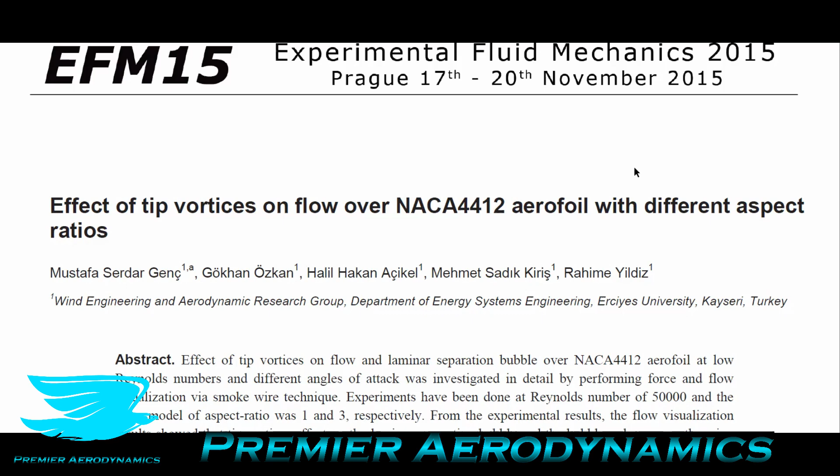So let's talk about the effects of these wingtip vortices with different aspect ratios. This is quite interesting because it affects all the flow physics.

One of the studies that looked at the effects of the aspect ratio on the aerodynamic characteristics of wings was presented by Mizoguchi and Itoh, and they first concluded that the influences of the aspect ratio were not as important as they first thought when the aspect ratio is above 3 or more. That means the span of the wing is 3 times the chord or more, so it's quite wide. But different aspect ratio wings below 3 were significantly affected, and the tip vortices have significant effects on the aerodynamic characteristics of these airfoils.

The effects of the tip vortices increased when the aspect ratios of these wings decreased. The maximum lift coefficient and the stall angles considerably increased as the aspect ratio was equal to or less than 1. In other words, as you reduce the aspect ratio, the maximum lift that you see in these wings and the stall angle dramatically increase, and we'll talk about why that is in a second.

A couple other researchers looked at low Reynolds number flows over different aspect ratio wings for Reynolds numbers of 10,000. This is important because at 10,000, the flow is most likely going to be laminar. That's not always the case if you have a very turbulent, very high turbulence intensity flow ahead, but typically speaking this is going to be laminar. Once you get to about 200,000, then that's when we generally get transition to turbulent.

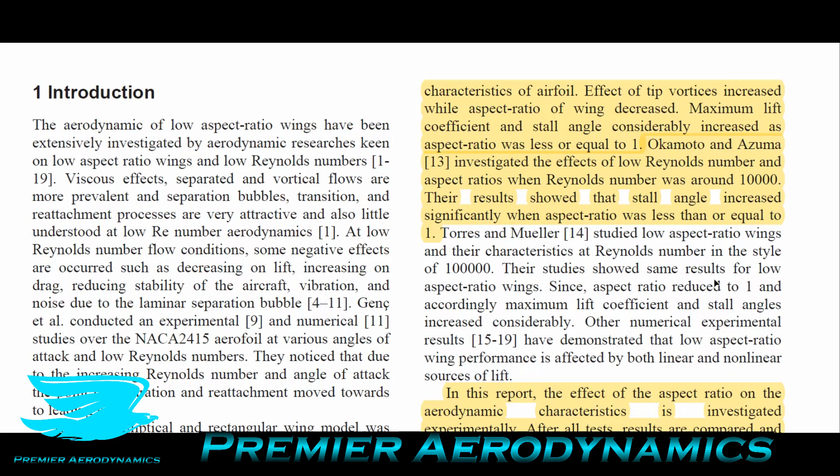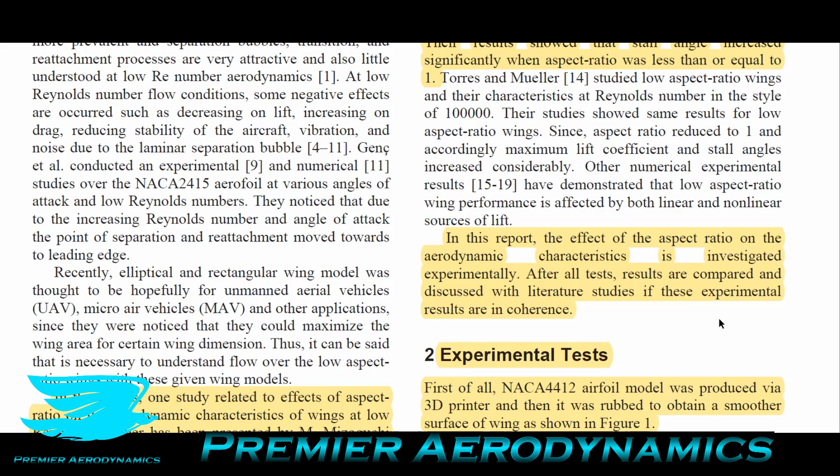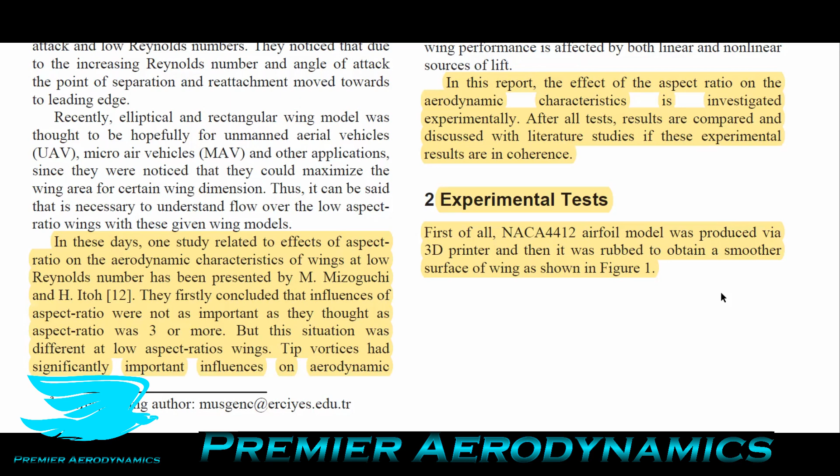In this study, the effects of the aspect ratio on aerodynamic performance is investigated experimentally. After all these tests, the results are compared and discussed with the literature to see if these experimental results are in agreement. The experimental tests involved printing NACA 4412 airfoils with different aspect ratios using a 3D printer, then rubbing them to obtain a smoother surface of the wing. This is important because even good prosumer and industry grade 3D printers have roughnesses to their surfaces, and this significantly changes the performance of the wing.

One major reason is that these roughnesses, depending on how you print the airfoil, can be longitudinal or lateral, and they will turbulate the flow and trigger turbulence at a lower Reynolds number. A rougher surface results in a more turbulent flow, and a more turbulent flow typically results in a higher stall angle because the flow has more energy.

As the flow goes along the surface of the wing, it can withstand what's called an adverse pressure gradient - this pressure pushing back against the oncoming flow, which decelerates it to the point where it separates. If you inject more energy, like higher momentum flow near the boundary layer close to the wall, this can overcome the pressure gradient even longer, to higher angles of attack, giving you higher stall angles. So surface roughness is a big deal, and that's why they sanded these down.

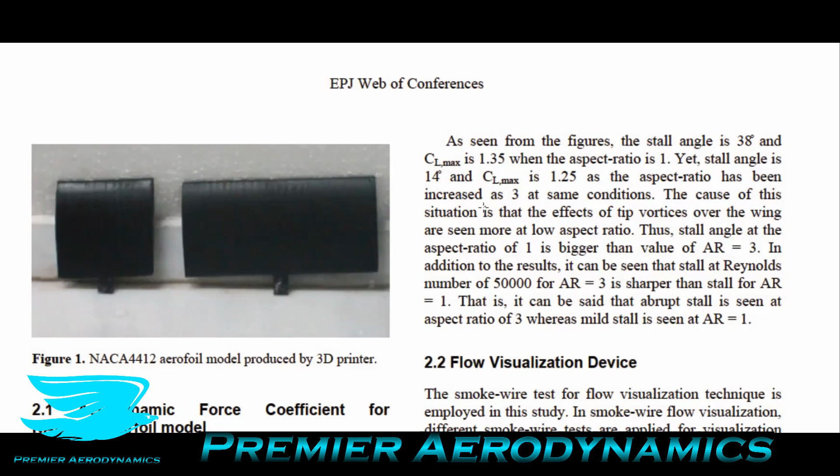That's good practice - if you get them straight out of the printer, they're going to be very rough. Comparing these with something coming from a CNC machine, they'll be very different because the CNC machine is much smoother. There are ways to characterize surface roughness, for example with lasers, or you can even do it with scanning, but that's quite advanced.

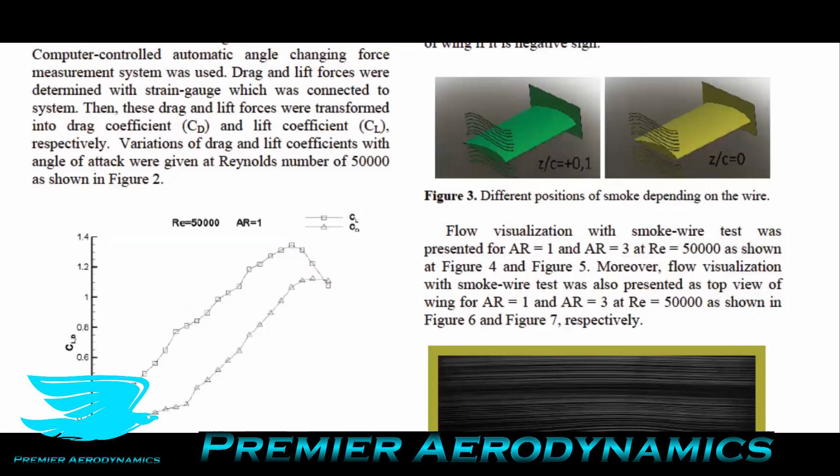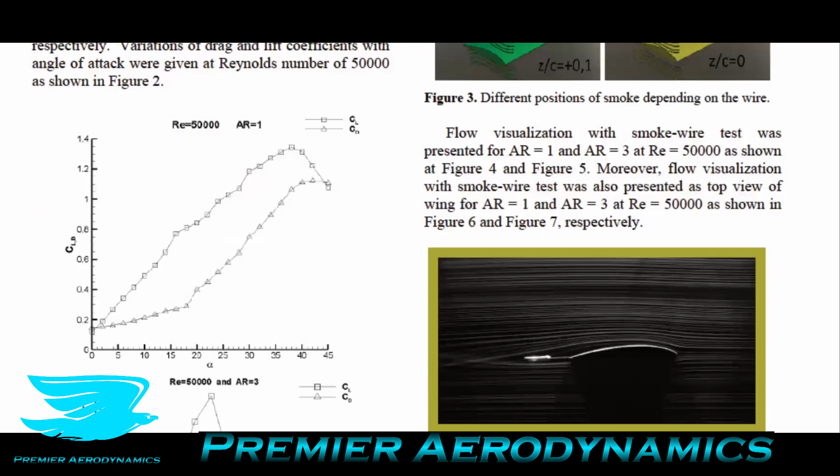For the aerodynamic force coefficients of the NACA 4412 airfoil, they have two airfoils - one with an aspect ratio of 1, and one with an aspect ratio of 3. The Reynolds numbers are 50,000, and they went from 0 degrees all the way up to 45 degrees for the aspect ratio 1 airfoil, but only up to 28 degrees for the aspect ratio 3 airfoil.

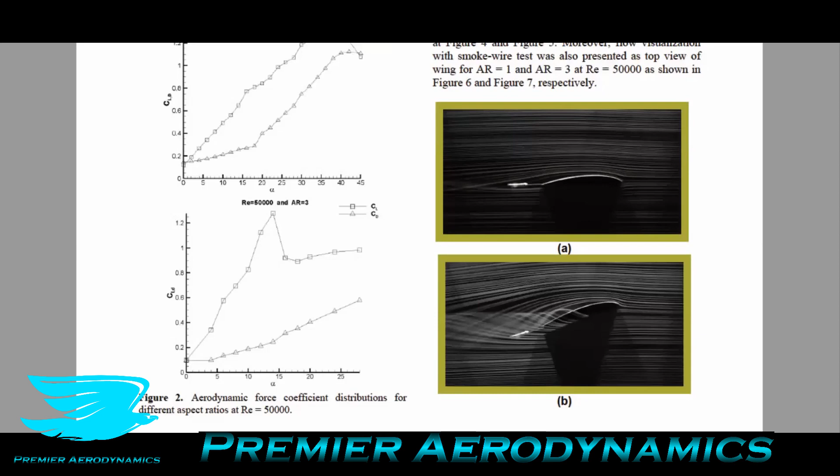There's a good reason for that. Let me zoom out so you can see these graphs - if you're listening, you can see the video on YouTube or Spotify. The top graph is for the airfoil with an aspect ratio of 1, so the span is exactly the same as the chord. In the squares, we have the lift coefficient.

On the triangles, we have the drag coefficient. The bottom graph is for an aspect ratio of 3. For the aspect ratio of 3, the stall angle of attack is only 14 degrees. Something to note is that at 0 degrees, both of these airfoils are still producing lift, and that's because this is a cambered wing.

It's a NACA 4412 airfoil, and this is a very traditional approximation of airliner airfoils - like a Boeing 747 or 737, they can be approximated by NACA 4412s. Obviously these airfoils are much simpler than airliner airfoils, because airliner airfoils have things like Kruger flaps and wing slats, etc. These ones don't - they're just a simple airfoil, but they're good approximations for a first initial understanding of what's going on.

At 0 degrees, they're both producing lift, quite a bit of it - about 0.1 is the lift coefficient. The drag coefficients are non-zero as well, and actually quite different. For the aspect ratio of 3, the drag coefficient is about 0.1, whereas for the aspect ratio of 1, it's about 0.15, so almost 50% more.

Why is that? The reason is because it's a stubbier wing - the aspect ratio is lower, which means the induced drag is greater. Why does that happen? Because you have a lot more lift being produced at the wing tip compared, relatively speaking, to over the entire wing. That means there's more air bleeding over the vortex, more wasted energy when you have a lower aspect ratio. That's why we get this greater induced drag, which contributes to the overall drag, giving a greater total drag coefficient.

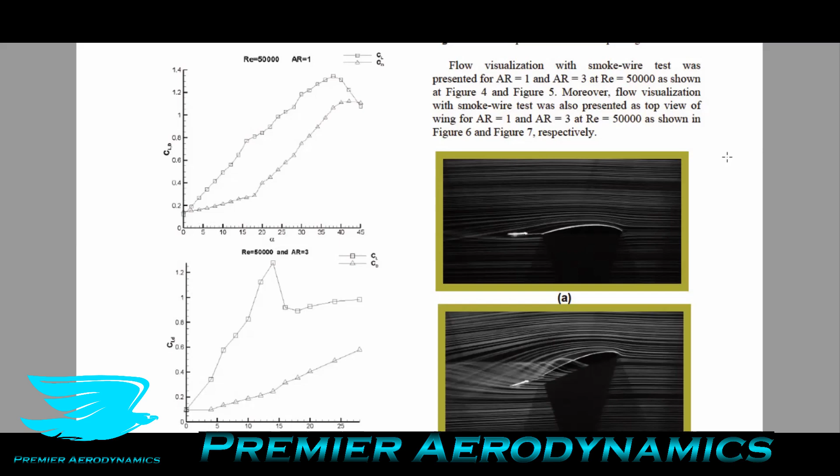That results in a net force pushing the airfoil backwards—that's the drag. They did some flow visualization to see how these wingtip vortices differ between the two aspect ratio wings, pitching them at different angles of attack, but the ones I'm interested in are at 24 degrees.

This is for a few reasons. One, at this angle of attack, the aspect ratio of 1 airfoil is still producing a good amount of lift, but for the aspect ratio of 3 airfoil, it's undergoing quite a lot of stall—not complete stall, but a decent amount. So we can see a massive difference in the wingtip vortex here.

First of all, it's much larger for the aspect ratio of 1 wing compared to the aspect ratio of 3. The other thing we can see is that for the aspect ratio of 3 wing, the wingtip vortex actually starts a little further toward the leading edge than for the aspect ratio of 1 wing. I'm not exactly sure why, because the smoke comes from the exact same point, and they didn't go into this in the paper, but there is a difference there.

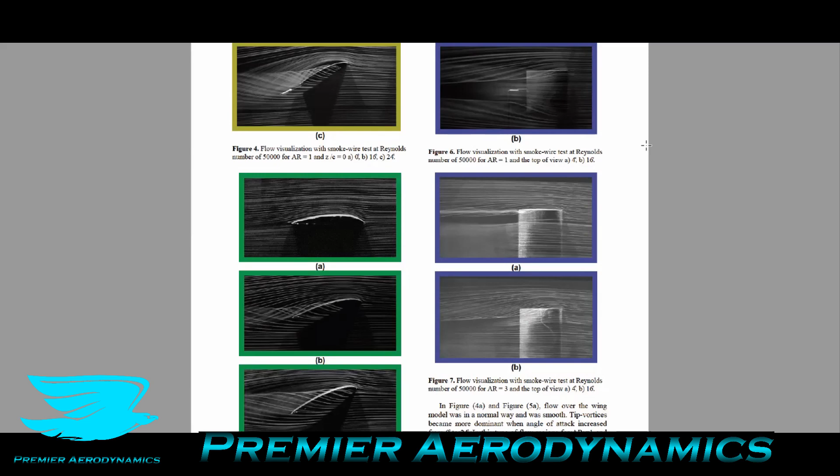They concluded that the aerodynamic characteristics and corresponding flow structures near the wingtip vortex, at a Reynolds number of 50,000, were investigated for two wings—aspect ratio of 1 and aspect ratio of 3—experimentally, using smoke wire and force measurements. For low aspect ratio wings, the tip vortices have a considerable effect on the characteristics of the NACA 4412 wing.

I should also mention that with a high aspect ratio, you'd see less of an effect compared to the aspect ratio of 3, but there would still be some effect. Usually once you get to aspect ratios of about 10 and higher, the induced drag drops a lot.

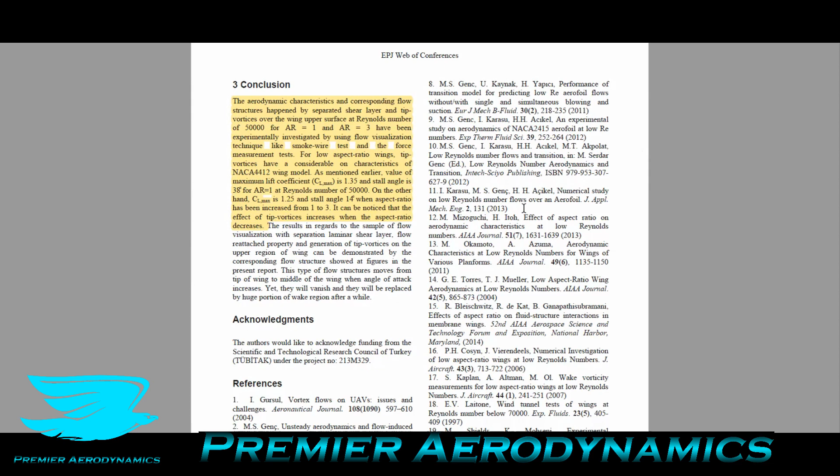That's why gliders—airplanes that are very underpowered and usually use thermals to glide—have aspect ratios of about 20. That's because the induced drag plummets, which means a much more efficient aircraft: the lift-to-drag ratio increases. The lift-to-drag ratio determines how much glide you get out of every meter you drop.

They only looked at aspect ratios of 1 and 3 because that results in the greatest differences in wingtip vortices and their effects on flow physics, lift, and drag. But even going above this, you get a drop in drag, meaning an increase in the lift-to-drag ratio, which is a measure of efficiency.

For low aspect ratio wings, the one with an aspect ratio of 1 had a maximum lift coefficient of 1.35 and a stall angle of 38 degrees. Comparing this to the aspect ratio of 3 wing, the maximum lift coefficient was 1.25—about 8% lower—but the stall angle of attack was about 65% lower, which is much worse.

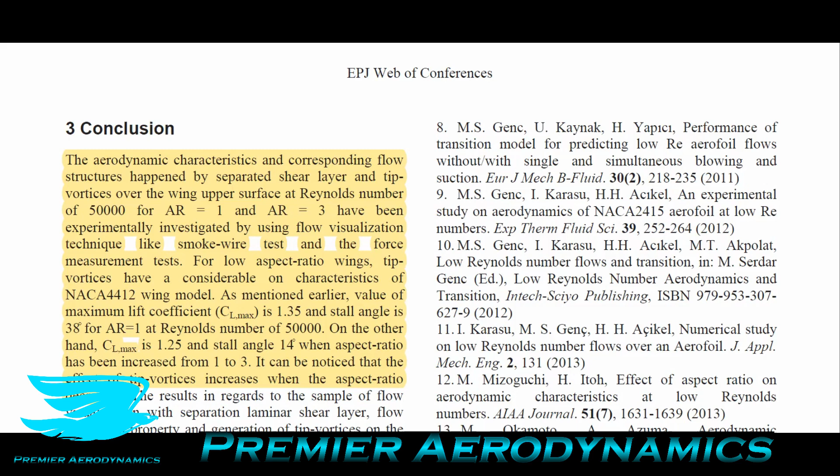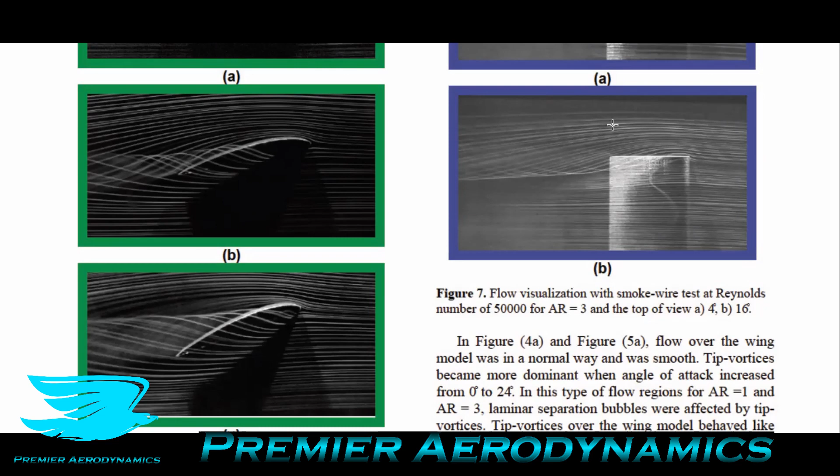So it can be noted that the effect of the tip vortices increases as aspect ratio decreases, and this makes sense because the tip vortices, as I mentioned, affect the oncoming flow and the effective angle of attack, which affects the lift and drag being produced. That's the end of this podcast.